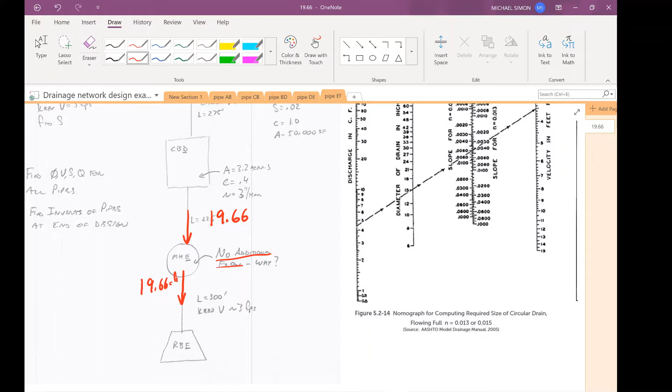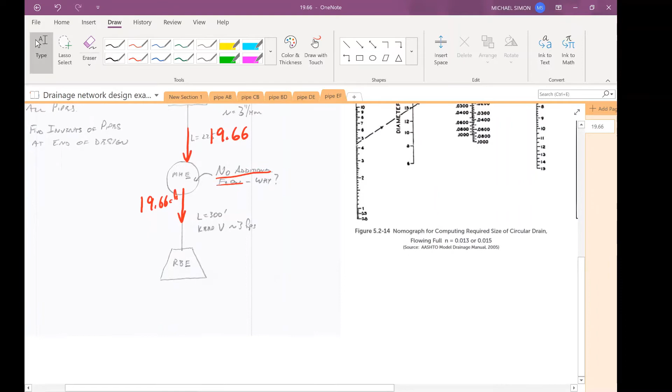So now we're going to size the pipe going out to the recharge basin. These last pipes in the series tend to be larger because the velocity has to be less. In the next video, after we solve the design, I'm going to talk about why it's so important to keep the flow low at the end of a recharge basin. So on this one, we want to keep the velocity around 3. We want to keep it on the low end, not necessarily down to 2, but around 3. 3 or less is usually good.

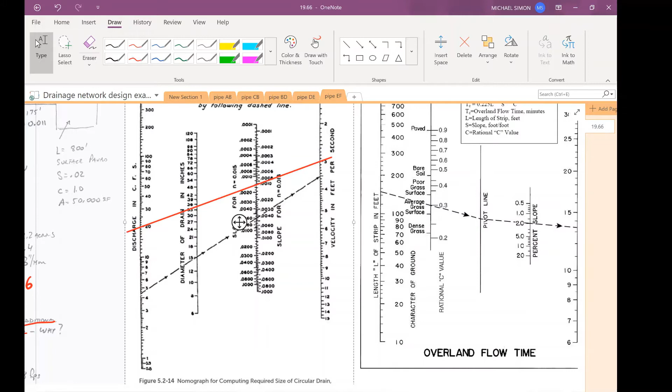So let's see. The reason we want that velocity to float a little bit is it gives us some ability to play with the diameters. Okay. So from a quick look at this, Q is around 19, so 19.66, call it 20 for the graph. My velocity says it's about 3 between a 33 and a 36-inch diameter pipe. So what should we use? We're going to use the 36-inch diameter pipe, and I'm going to tell you why.

Not that you need to be concerned about this now, because when you get out into industry, these things may change, but they've stopped making 21-inch diameter pipe. They've stopped making 27, they've stopped making 33, and I don't think they make 39 as well. Basically, every time you want to make one of these pipes, the molds are very expensive, and to stock this stuff just got too expensive. So generally you're going to see 18, 24, 30, 36, and so on. But that shouldn't concern you right now. You can still design. If it's on the nomograph, fair game. There we go, get that back.

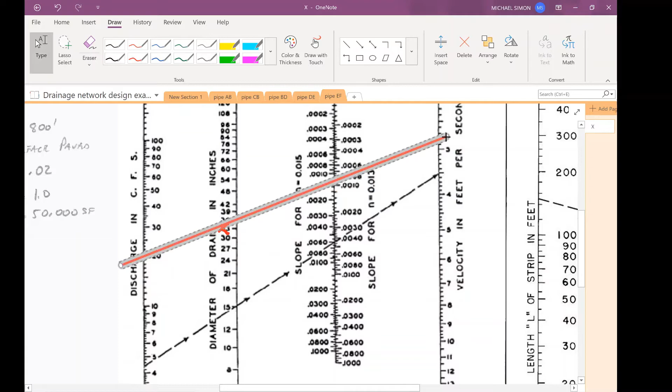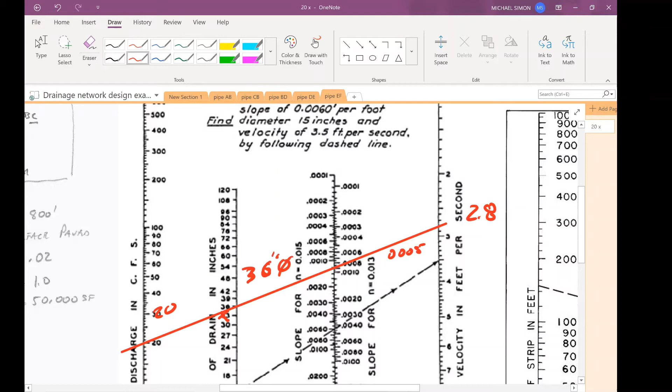So what I'm going to do is I'm going to bring it up to 36 inches. 36 inches, which puts my velocity less than 3, but still above 2. Around 2.8, and a slope of about 0.0005. 2.8, 36, and 20. That's what my numbers look like on here. Okay, let's prove it out mathematically.

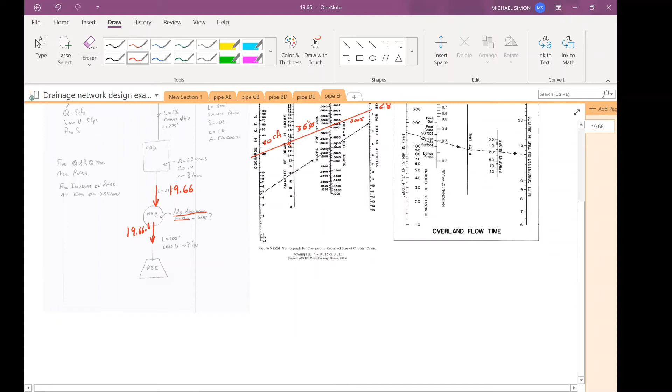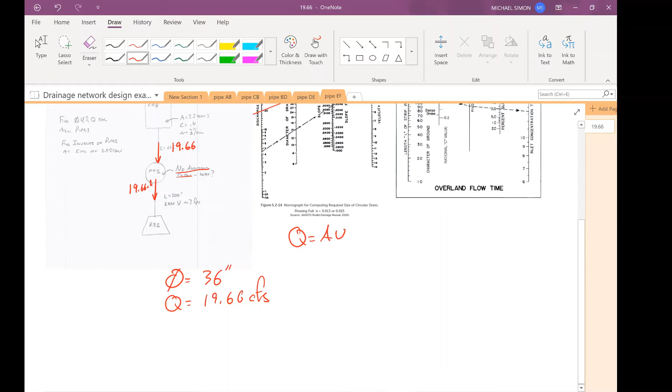So let's see, we said that the diameter would be 36 inches, which is a pretty good size end pipe to work with. We have a Q of 19.66 CFS. Everything else we're going to solve for. So Q is equal to AV. Velocity will be equal to Q over A. So velocity will be 19.66 CFS over 3 squared pi over 4. So 19.66 divided by 3 squared times pi divided by 4,

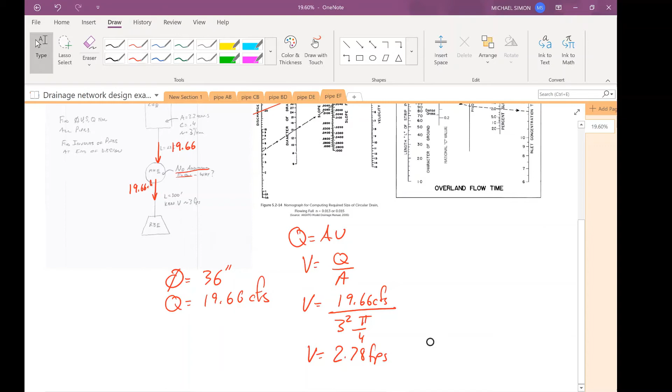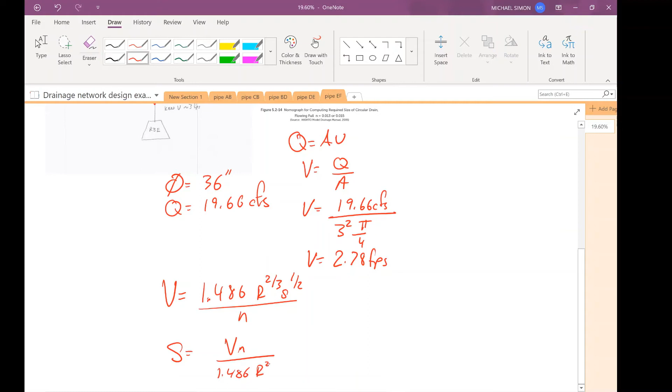2.78 feet per second. I think I said 2.8. So again, we're in that ballpark from the nomograph. Yeah, 2.8. We're close with the nomograph, which is what we're looking for. We take that 2.78, go right back into the Manning equation: V equals 1.486 r to the 2/3 s to the 1/2 over n. We manipulate that equation: S equals (Vn over 1.486 r to the 2/3) squared. Have you memorized this yet? Told you you didn't have to, but by hearing me say this over and over again, it gets stuck in your head.

2.78 times 0.013 over 1.486 times 3 to the 2/3. So my slope would be equal, oh, squared. That would help. So 3 raised to the 2/3 times 1.486, times 2.78 times 0.013, squared. 0.0001.

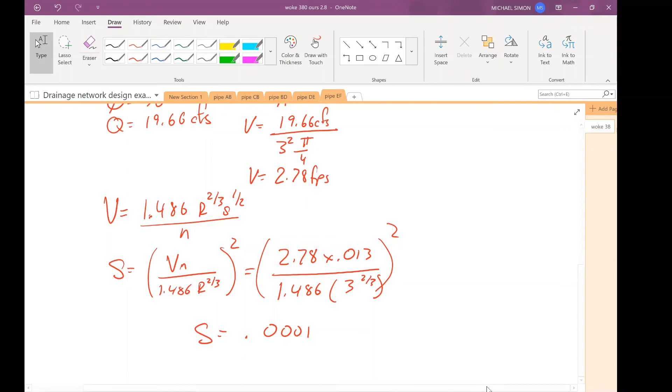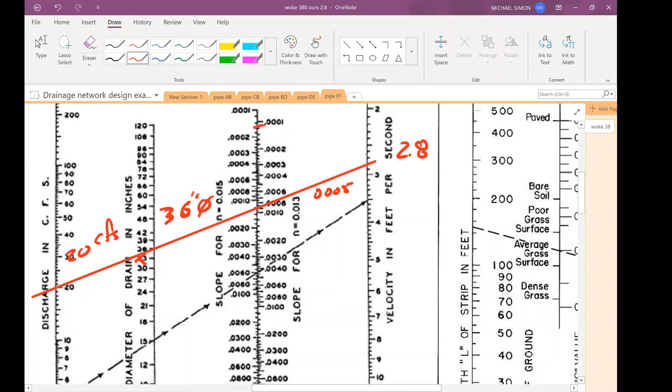I thought I came up with a different slope. 0.0001, all the way here. Something doesn't seem right. Let me look at what I did. Oh. Hydraulic radius. 3/4. Okay. Well, I'd like to say that that was on purpose, but first mistake of the semester is on video now. That's why I use the nomograph. The nomograph is going to give you the answer, and you're just making sure it matches. You can catch your mistakes.

Let's try this again. 3/4 raised to the 2/3 times 1.486. Inverse that, times 2.78 times 0.013, squared. Much better. 0.00086, so we'll round it up to 9. 0.0009.

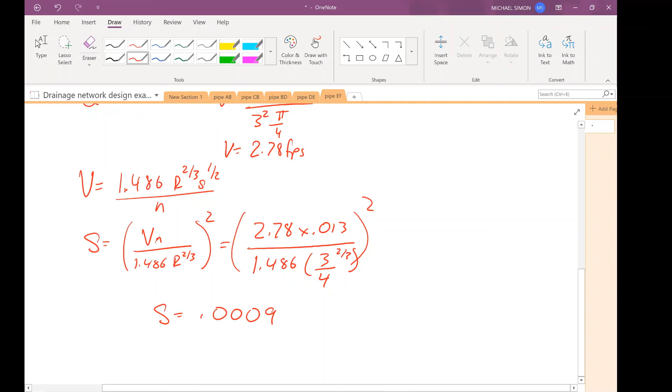Okay, so that concludes sizing up the pipes for a pipe network. This is just 1, 2, 3, 4, 5 pipes. If you think about most subdivisions, they can have upwards of 20 or 30 or 40 pipes or more. It's not any more complicated. It just takes more time as you go through it.

So what we're going to do now is put this problem off to the side for now. We're going to go back to it later on in today's class. But first I want to talk about recharge basins, go through some diagrams of what they look like, how they're constructed, and really what that end section looks like, because that's a pretty important part of what we need to talk about. So I'll close this video down, and the next video will be talking about the recharge basins.